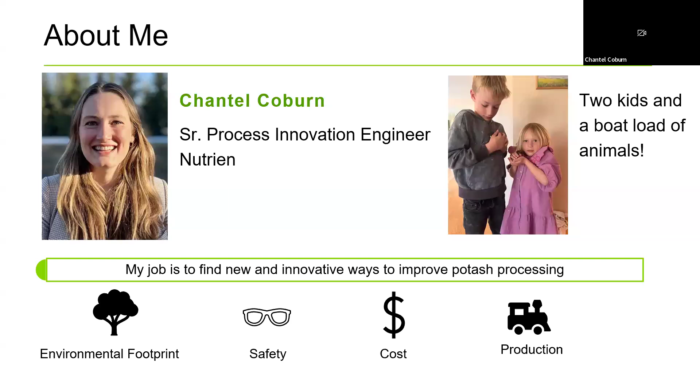A little about me, Chantel Coburn. I am a senior process innovation engineer at Nutrien, and really my job is to find new and innovative ways to improve potash processing. That can encompass a few different things: looking at ways to reduce our environmental footprint, improve safety to our operators, reduce the cost of potash that we make, or increase our production. That's the work part of me. And then the other 51% of me, I guess, is the fact that I have 2 little kids and a boatload of animals. So there they are with our new chicks.

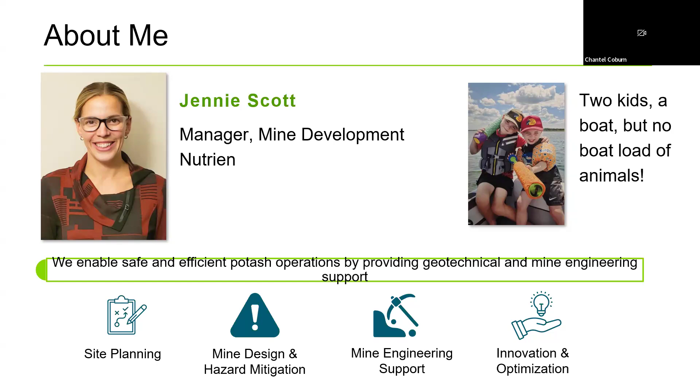So for today's agenda, we're going to talk about what potash is. This is going to be very like Potash 101, so if you're an expert, you'll probably know some of this already. We'll talk about what potash is, the geology of Saskatchewan and how we got the potash we have here, then go into mining 101, and then Chantel will take over and talk about processing.

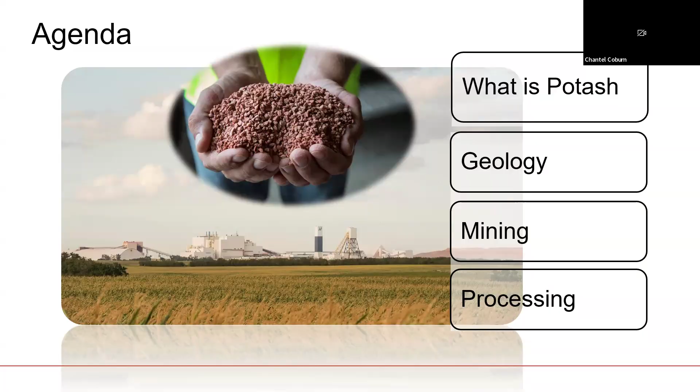So to start us off, what is potash? Potash is a generic term for a variety of mined and manufactured salts, all of which contain the mineral potassium in a water-soluble form. So it's a very generic thing, but what does potash mean in Saskatchewan?

Really, what our potash here is made up of is about 40% sylvite, 55% halite, and 5% insolubles. The 40% sylvite is the potassium salt, and that is what we want - that's what we're trying to mine. We want to get that potassium, and that makes up about 40%.

The 55% halite is just regular old NaCl, or table salt - the stuff you put on your French fries - and we've got 55% of it in our ore body. The remaining about 5% is what we call insolubles. Often we'll refer to these as clays or clay seams, but they're not actual clays - they're fine-grained anhydrites, dolomites, quartz, and other fine-grained insoluble minerals.

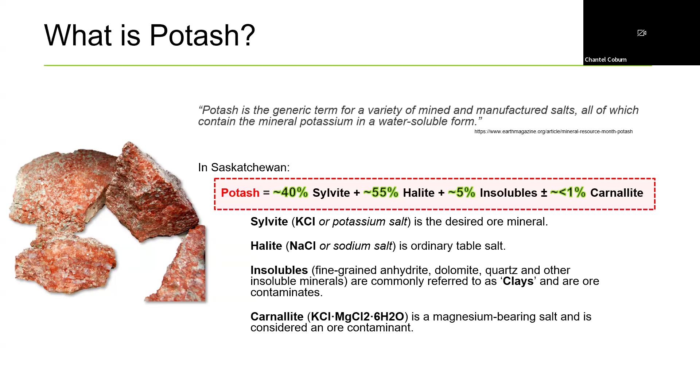And then we do have a little small percentage of carnallite. Carnallite is a magnesium-bearing salt. It's considered an ore contaminant - the mine doesn't like carnallite, the mill doesn't like carnallite - so we try to avoid carnallite if we can, but we do sometimes get a little bit of it in our potash mines.

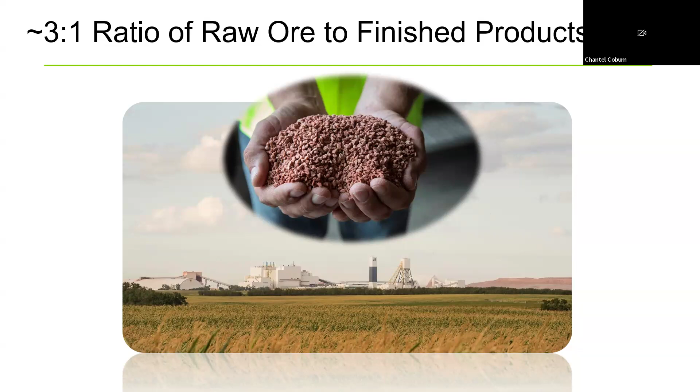There's about a 3-to-1 ratio of raw ore to finished product. What that means is, since we have more halite than sylvite, when we bring raw ore to surface, for every 3 tons we bring up from the mine, we end up with about 1 ton of finished product. The rest, about two-thirds of it, ends up going to that beautiful pink tailings pile in the lower right of the picture. So when you're driving through Saskatchewan, you'll see lots of these pink hills near our potash mines off the highways - if you see those, they're basically salt for the most part.

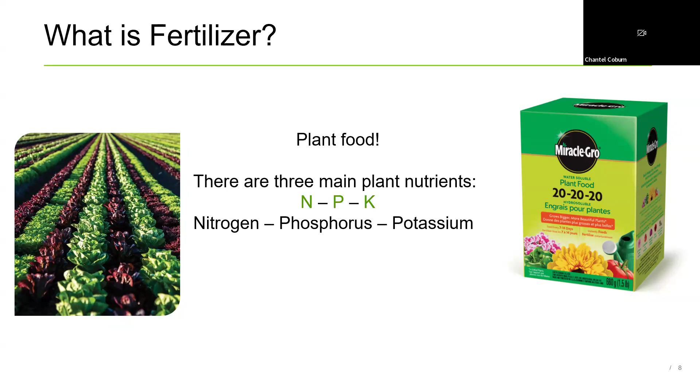And of course, what is fertilizer? I talked about us wanting to get that potassium out of what we mine - the potassium is used for fertilizer. There are quite a few different uses of potash or potassium, but really the main thing is fertilizer. Fertilizer is obviously plant food - we feed our crops with it, we grow strong crops because of the nutrients we put into the soil from the fertilizer. There are 3 main nutrients in fertilizer: nitrogen, phosphorus, and potassium. Where our potash mining industry comes in is that potassium piece.

Okay, so we know what potash is, we know what it's used for, but why is it here? The really cool thing with Saskatchewan potash geology is that we have the best potash deposit in the world, right here in Saskatchewan. So right under all of our feet right now, we have this world-class deposit. So why do we have this deposit? How is it here, and why is it so great?

About 360 to 390 million years ago, the Earth didn't really look how it does now - our continents weren't in the same spot. If you think back to your high school or elementary school days, if you remember the term plate tectonics, there are plates that move around, and so things aren't where they are now, where they used to be, I guess.

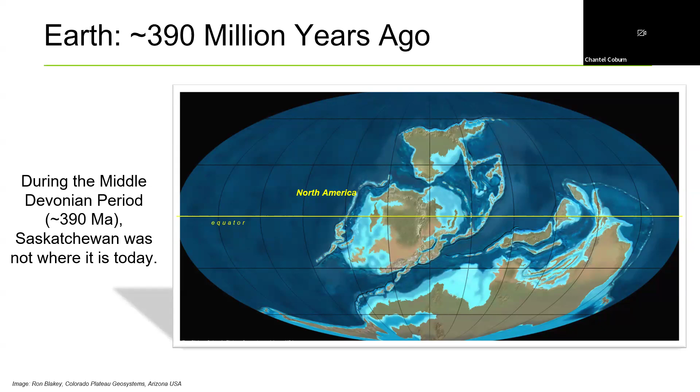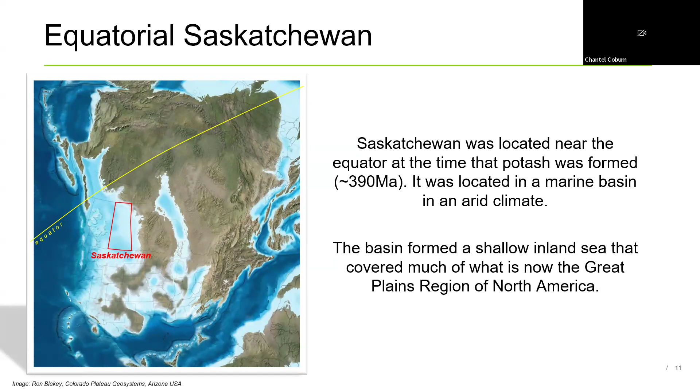360 to 390 million years ago, Saskatchewan wasn't where it is now. It was located right near the equator, in a marine basin in a very arid climate. That's when potash formed. If you think about a hot holiday near the equator, there's often an ocean, it's hot, it's sunny. This is a very important piece to how our potash formed.

Basically, there was a bit of a lagoon or a low-lying inland sea where Saskatchewan was, and it was hot. The water evaporated and left behind potash and salt deposits. There's a bit more to it: a reef in the northern part of the basin called the Presqu'île Barrier Reef restricted the influx of fresh water into that lagoony, low-lying sea. Shallow waters, intense sun, and evaporation led to this amazing deposit called the Prairie Evaporite Formation.

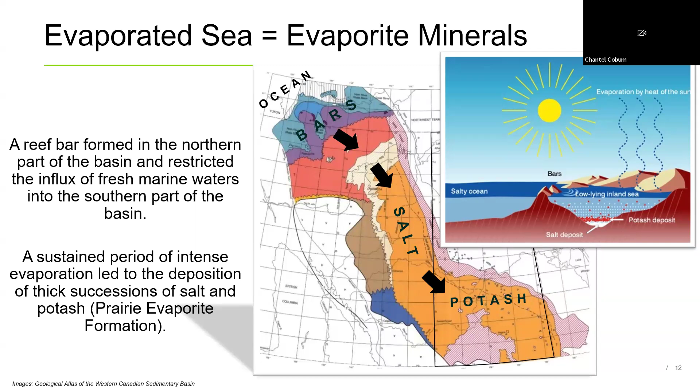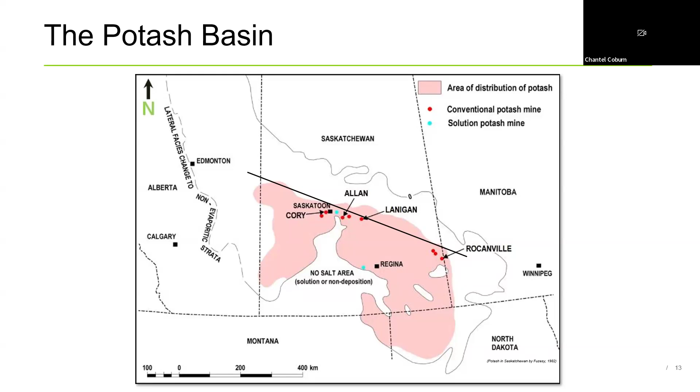So you know where the potash is — how do we get to it and how do we mine it? How do we get underground? When you drive to our potash sites in the province, you'll generally see two tall buildings — these are our shafts. You'll always see a smaller shaft and a taller shaft.

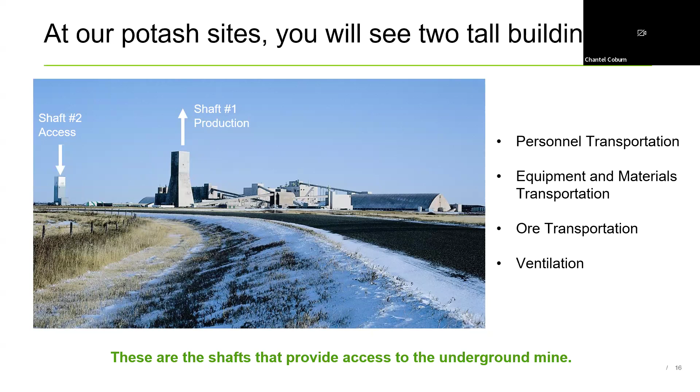I wanted to put a couple slides on the shafts themselves because this is important, the construction side of things. So how do we sink a deep shaft, 1,000 meters deep, when they're such a critical component? If we didn't have our shafts, we wouldn't have our potash mines.

I pointed out that Blairmore Formation a couple slides ago. That's an important formation because it's a sandstone formation. Basically, if you were to go to that formation and scoop it with a shovel, it's essentially beach sand. It's an aquifer, full of water, and loose, unconsolidated sand. So it's something that's very, very difficult to sink a shaft through.

In fact, the first potash shaft ever attempted was in Saskatchewan, in the Unity area. Because of this formation, they got as deep as that formation, it flooded the shaft, and they just couldn't get control of it and lost the shaft. So we don't have a shaft or a mine in that location because of that.

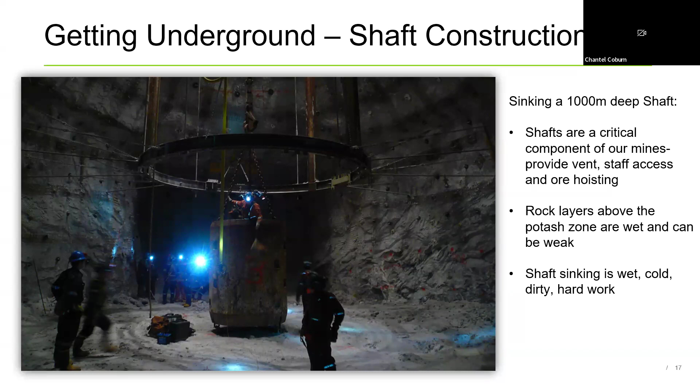After that, we had to get smarter and figure out exactly how to mine through these formations to get to the potash. So this picture is of our Scissors Creek shaft. This is our newest shaft at our Nutrien-Rocanville mine in the southeastern part of the province.

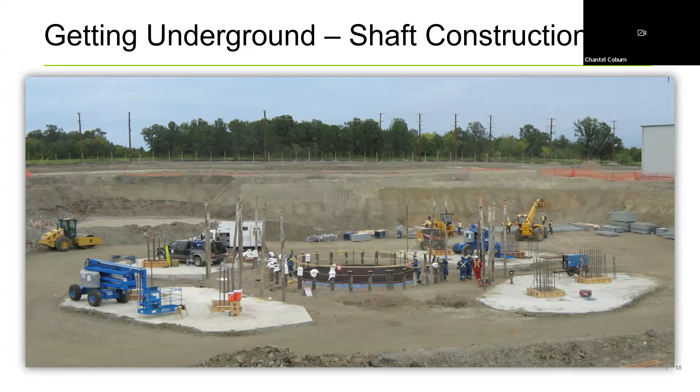This is before the shaft construction. If you look at all of these pipes sticking out around the diameter of what will be the shaft, those are called freeze holes. We have to freeze the ground in order to sink through it. Really what we're trying to freeze are those aquifer layers, and the most important one is that Blairmore Formation. So we freeze down, those pipes go a little bit deeper than the Blairmore, and we freeze that ground so that we're able to sink a shaft without flooding it as we go.

So those cast iron tubbing pieces are basically these rings that go in at the aquifer locations. At the Blairmore Formation where we froze, we would install these cast iron rings, and this is basically what prevents our shafts from flooding and withstands the pressures of these water bearing formations.

Fun fact about those cast iron tubbing rings: there's a display at the Western Development Museum as well as at the Saskatoon Airport in the baggage carousel area. There's a little display that explains these rings and talks about them. Pretty cool innovation, and without these, we wouldn't actually be able to sink our shafts in the province.

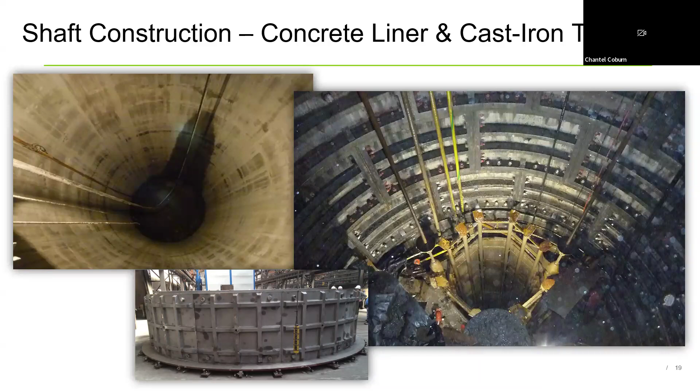But it's a lot more open than people expect. We've got full travel ways, full vehicles cruising around down there, and it's kilometers and kilometers long, so they're quite large. Okay, so we've made it underground. Now we're going to talk about the mining process.

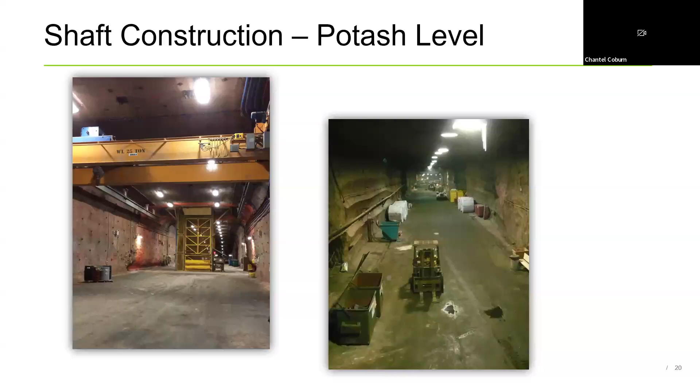If we were to mine not that far out, but close to the shaft, and start doing a bunch of mining around it, we would actually impact our travelways and they would start to deteriorate on us. So it's very strategic why we do this style of mining.

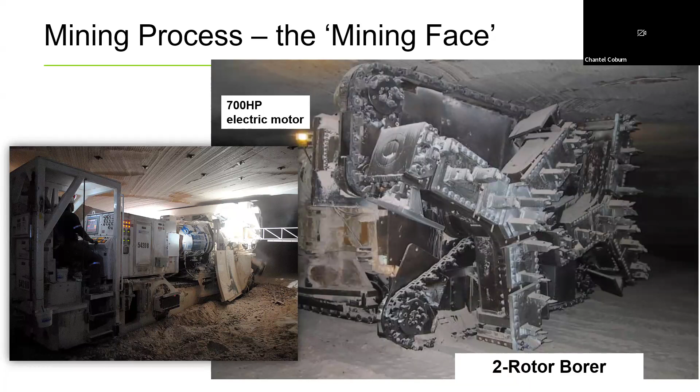Those are bits. Basically what happens is these rotors start to spin together, and then the bits spin as the borer advances into the rock, into the face, and those bits go into the face, into the rock, and start to grind the rock. So they're spinning and grinding that rock. There's actually a conveyor belt in the throat of the machine, so the rock is falling to the ground and getting sucked up into the throat onto a conveyor, and then it's going to the back of the machine. So that's the process of cutting at the active face.

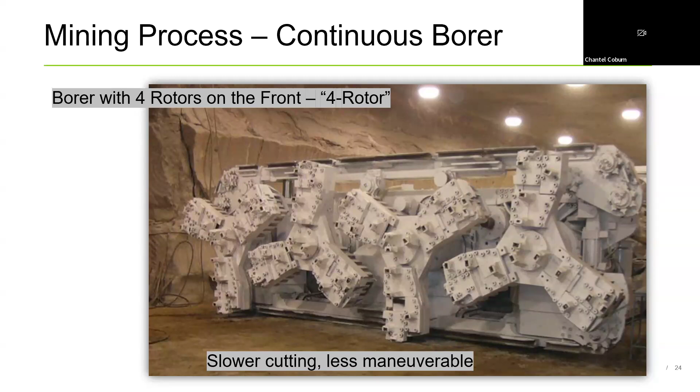We also have these rotors, or borers. I mentioned some have 4 rotors, so these are wider in profile. Depending on the geology and where you are in the province, that dictates whether you can use a 4-rotor or a 2-rotor machine - the geology dictates how we mine. In many cases it'd be great to mine wider or larger spaces, but we're limited based on what our geology allows us to do. These 4-rotor machines are used more in the southeastern area of the mine, where we have less clay seams and different ground conditions.

In a perfect world, if we could mine underneath them and not send these clays to the mill, that'd be great, because the mill doesn't want these - they want to get them out of the ore. But the problem with those clay seams is they're very weak and they will fail. So we don't mine underneath them because we know we'll end up with ground issues and our roof or back can cave in if we leave those seams above us. So it's very important for our operators to use these seams as a guide of where to mine - they pay attention to these seams as they mine along and make sure they stay along them, cutting them out.

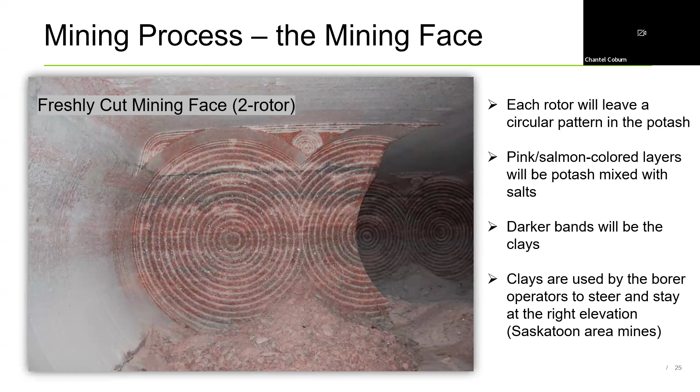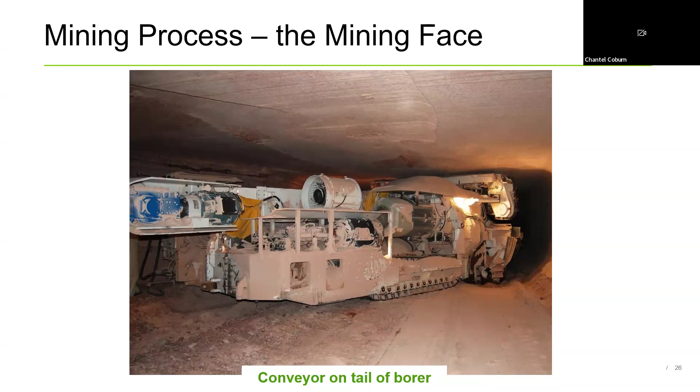So this is the back of the machine. In this case, the front rotors are up here, and I mentioned that the ore will come up the machine and onto a conveyor. So here's the conveyor on the tail of the borer - that ore is going to come up and dump off of that tail as the machine advances forward.

Basically, it allows the mining machine or borer to advance forward, back up, and go at different angles, all while having those conveyors attached behind it. From these bridge conveyors, there's another conveyor called the panel conveyor behind them. So once you cut the ore, you're dumping it onto a series of conveyors all the way back to the shaft.

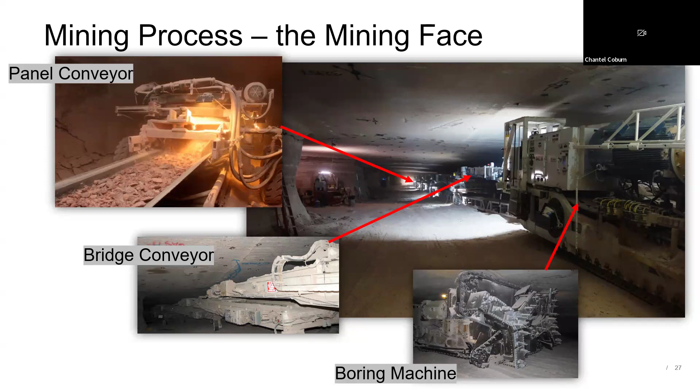Out of the actual mining room, the ore then goes onto what we call mainline belts. Again, just a conveyor belt, but these are special in that they're often wider and actually hung from the roof or the back of the mines.

We find in our potash mines that the roof stays in better condition than the floor. Often the floor will buckle up or heave, partly because of the clay seams in the floor. So we mount these mainline conveyor belts onto the roof for long-term maintenance reasons, so we're not dealing with ground conditions as the ore travels back to the shaft. We have tens of kilometers of travelways or belt lines for the ore to make its way back to the shaft.

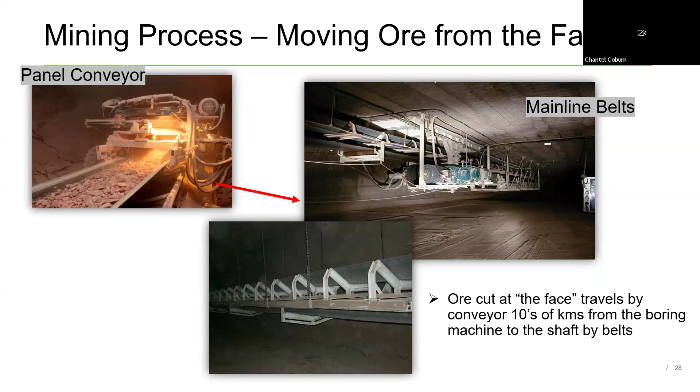Essentially the ore gets onto these mainline belts and just dumps from one belt to the next all the way back until it makes it to the shaft area, where we have bins.

The bins basically decouple the mining process from the surface operation. The ore can go all the way back to these bins, and let's say the mine has a down day but the mill wants to keep running. If our bins are full, we can keep feeding the mill so it doesn't have to shut down, even if we need to take a down day in the mine.

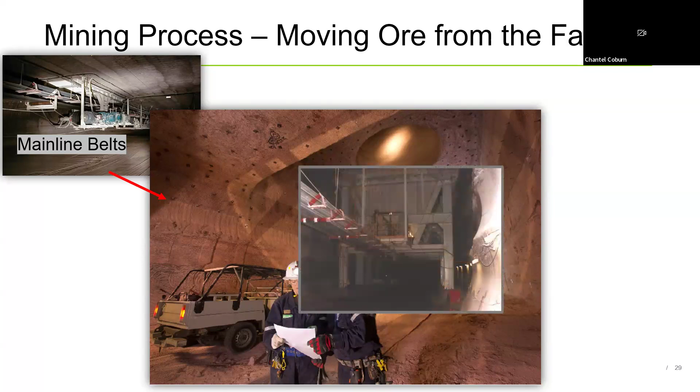So that's what a bin looks like after we cut it. This is just to show what a bin would look like once you get all the infrastructure in - you can see all the steel there. Basically the ore would come into the bin from the top and then come out at the bottom.

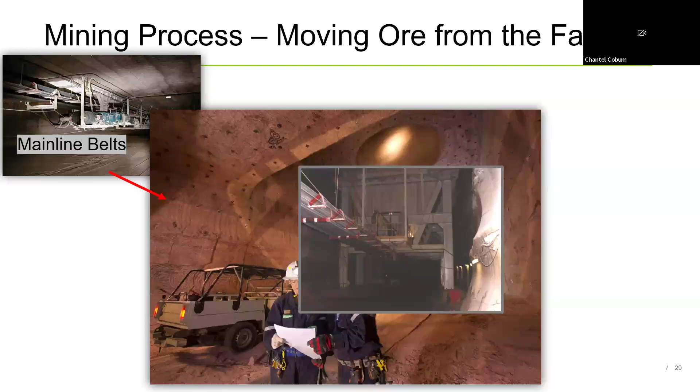From the underground bins, material is weighed underground by belts and then loaded into skips. The skips are what's actually inside the shafts, inside the production shaft, and that's what's actually carrying the potash ore to surface.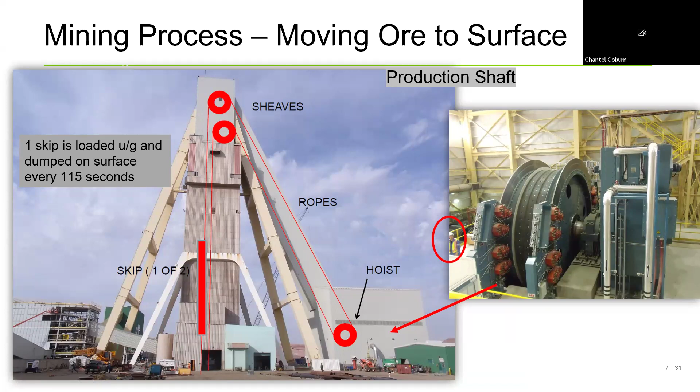Okay, so that's basically the process of potash mining, pretty high level, but essentially then we get the potash to surface, and from a mining perspective, we don't know what happens. It just goes into this black box we call the mill, and they process it. So Chantel's going to tell us what happens next.

Perfect. Thank you, Jenny. All right. What is potash processing? The magical black box. So really, it's how we get from this, the ore that Jenny worked so hard to get up onto surface, to this, our final product.

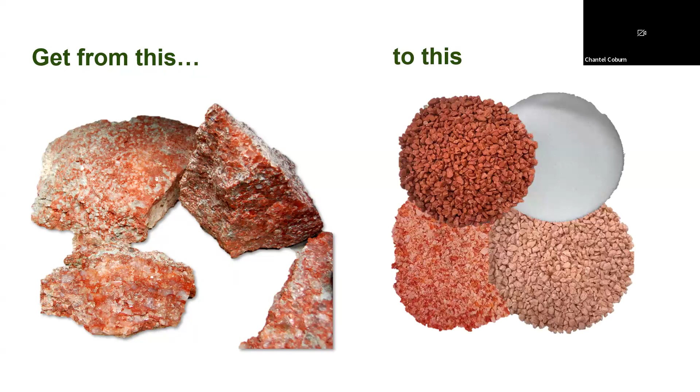So we kind of went over this, but just a little bit of a deep dive again. So the ore that comes up to surface, it's composed around, depending on the ore body or the mine site, 40% KCl. That's the potash part, that's the stuff we want. And then there's around 55% NaCl, the salt, and then 5% insolubles or clays, what have you. That's the stuff we don't want. And they're quite intermingled with each other, so it takes a little bit of work to actually get them separated.

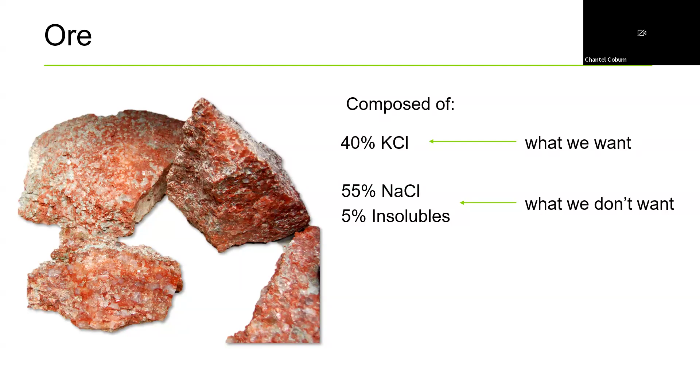And just as a little bit of a side note, this is really a presentation discussing conventional mining where we get the ore from underground, bring it to the surface, and process it conventionally. But I will touch on crystallization, which is the premise of how solution mining works as well.

So then our product, we call it muriate of potash or MOP, and it's composed primarily, or 95% KCl, so that's the potash part, and sometimes more. So on the picture on the left, the red and the pink, sort of coarser looking material, that's our granular potash, and that's used in mechanized farming and is often mixed with nitrogen and phosphorus and gets applied to fields.

The one on the bottom left down here, that's called standard product, and that's typically sent to Southeast Asia, and it's hand broadcast onto rice fields, things like that. And then this white stuff up here, that can be up to over 99% purity, and it's an industrial grade product, used in things like pharmaceuticals, the chemical industry, things like that. So it's really, really high grade.

And there are other varieties, but these are just an example of some. And the reason this is darker and this one's lighter on the granular product is just it's from different ore bodies.

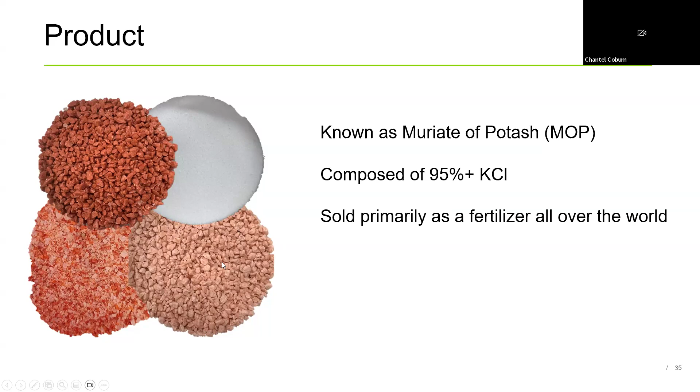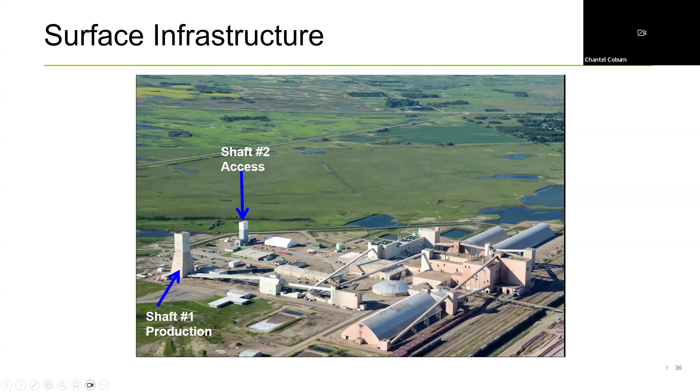So a little bit of a take on what the surface infrastructure looks like from the outside. Jenny already talked about the production shaft, the access shaft, and then you can see from this production shaft, there's belt galleries that take the ore all the way to our processing buildings, our mill buildings right here. So this particular mine site has 2 mill buildings. They were built at different times, but depending on the facilities, there's often just one.

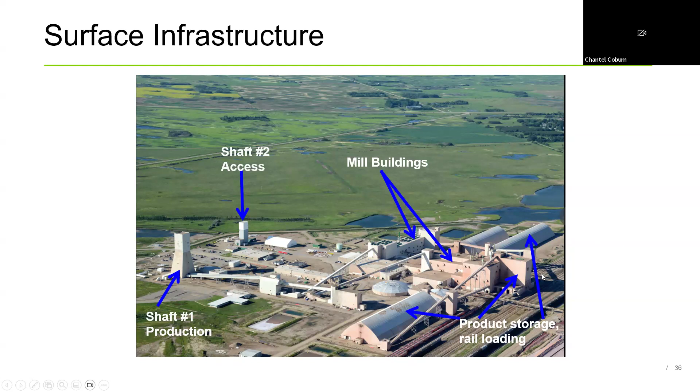And then after that, we have our product storage buildings. So these are the buildings where our product goes before it's loaded onto rail cars and shipped all over the world. So now let's take a look inside those buildings.

So we're going to go through the mill process, and hopefully it's not too overwhelming or confusing. So again, once ore is on surface, we need to go to crushing and screening. So crushing and screening, really the goal of it is to liberate the KCl, the potash, the stuff we want, from the NaCl and insolubles or slimes, that's the stuff we don't want, without creating excessive fines, because the fines are really hard to recover and separate from each other.

So this fun picture right here is called a QEMSCAN image. The purple represents the salt, the green represents the KCl, and the gray kind of represents the insolubles, probably anhydrite or something in this picture. And you can see that at this size of particles, they're mostly liberated is the word we use. So the particles are separate from each other, though there are some that are still together, and we don't completely crush to liberate all the particles just because of the fines I talked about.

So there's actually a regrind stage later on. And then we send that ore through to these crushers. This is a common type of crusher in our mills, called a cage mill, just as a size reduction.

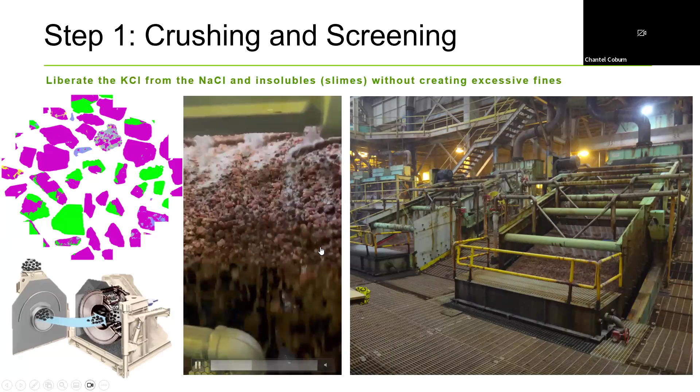And then we use screens. There's various different varieties of screens, lots of newer ones, but they essentially all do the same thing. We screen out the material that's on size, and everything that's still oversized goes over the top and gets another round of crushing. So once we have our on-size material, it's important that we need to de-slime it, get rid of those insolubles. The slimes or insolubles are deleterious to the flotation process, so we have to remove them prior, or else we use excessive reagents and the process just isn't efficient. So it's really quite simple, but very important to get done right.

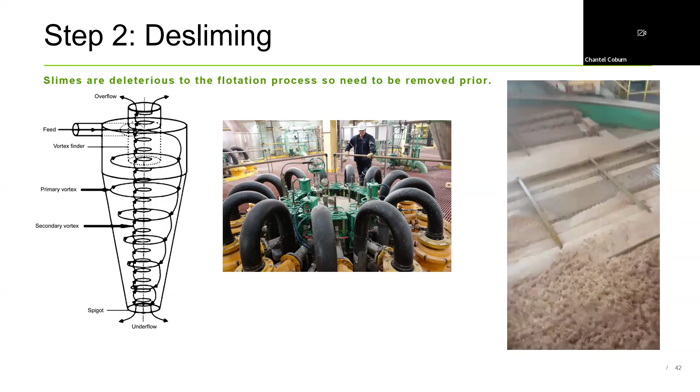So we primarily use cyclones or hydroseparators in the desliming process. Cyclone operation's quite simple. Really, it just uses centrifugal force, and the really fines and the brine go out the overflow, and then the on-size product, which is higher in density or higher percent solids, goes out the underflow. We then use hydroseparators, which use fluid dynamics essentially, and the really fine stuff, which ends up being the clays, comes to the surface, and then the KCl that we want to recover goes to the underflow of these vessels.

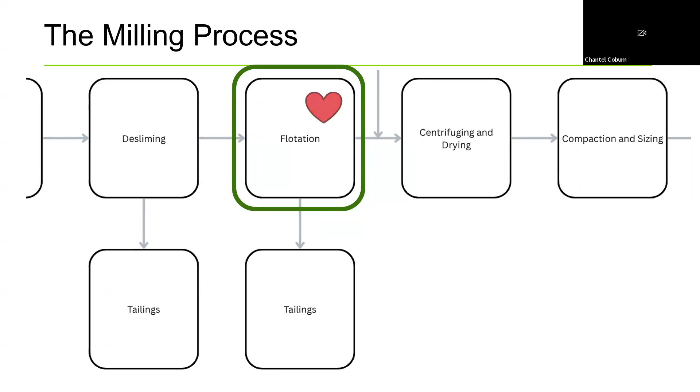So after our ore is deslimed, we move on to flotation, which is really, I consider the heartbeat of our mill process. And flotation is a physical chemical process that's used to separate the desirable minerals from the gangue minerals. So it is quite simple, but anything that's quite simple has a million little nuances that go with it.

In our slurry, as you noticed before, it's a wet process. The ore comes up dry, but we add brine to it once it gets into the mill. So we add chemicals to this slurry that we've created, and they're called reagents. And that allows the KCl to selectively attach to bubbles and float to the surface. That's our concentrate, the stuff that we want. And then the salt is what we don't want, and it's actually just left behind at the bottom. So you can see this fun image of bubbles collecting KCl particles.

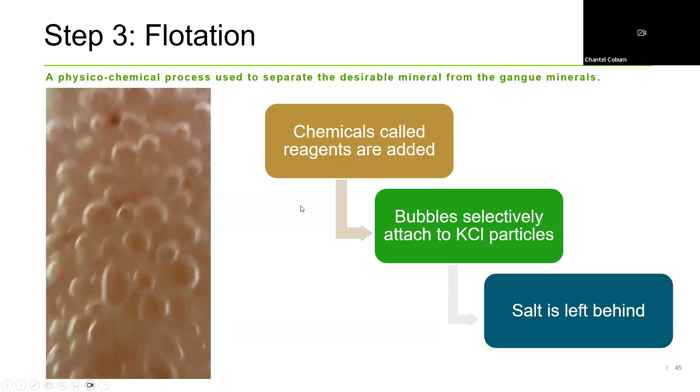And they've been added to our new mills. They're designed like that. And they're also added to the existing mills as cleaners, we call them, so they actually upgrade the concentrate grade of these mechanical cells.

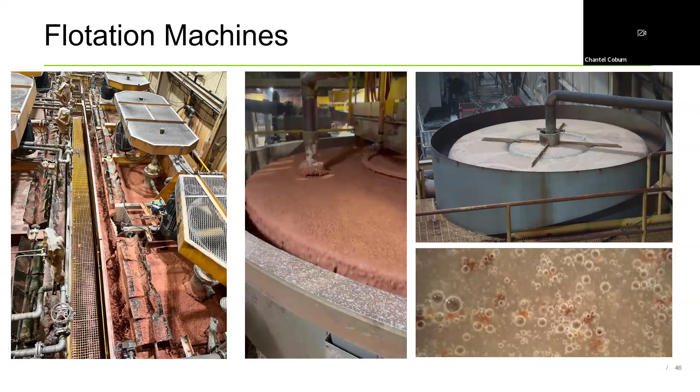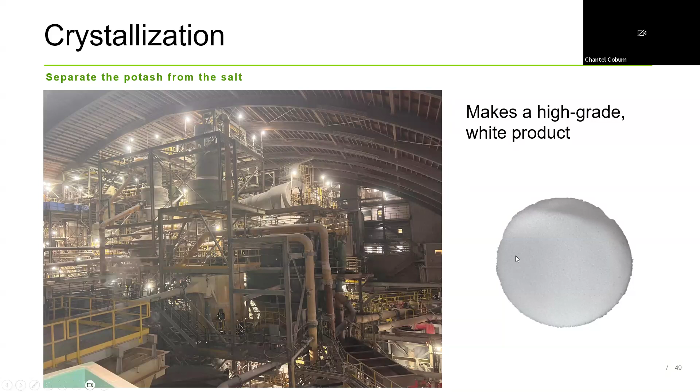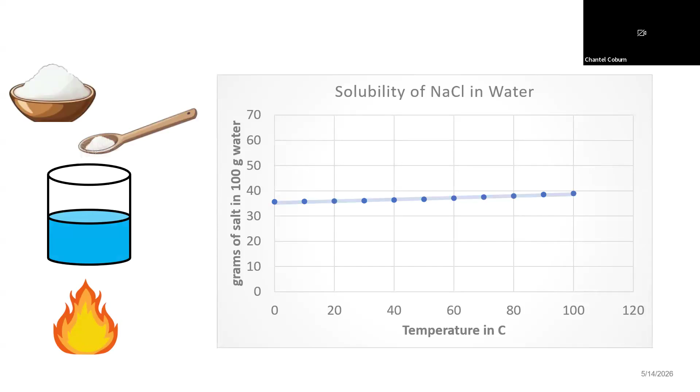A little bit in depth on how crystallization works. Let's take an empty glass, add 100 grams of water, and then add some salt. Add some heat and keep it saturated, adding more as the heat increases. Then you can watch that saturation line: the water can absorb a little bit more salt as the temperature goes up.

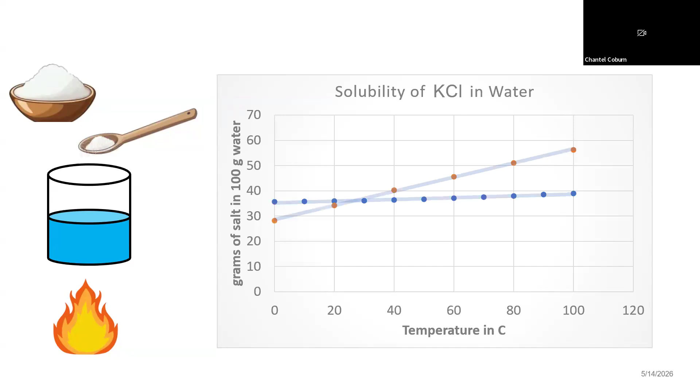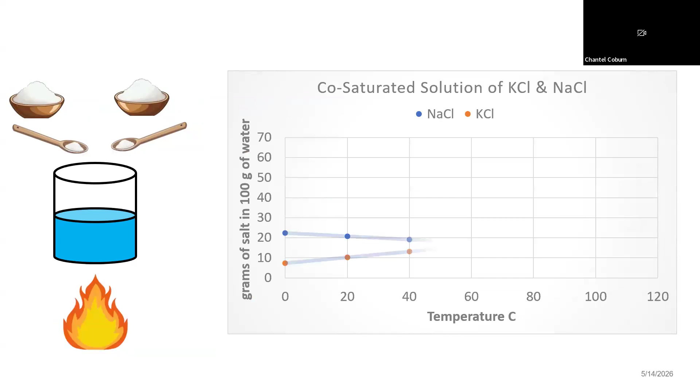But what happens if we add them at the same time? Again, take our empty glass, add 100 grams of water, take our NaCl and KCl, start adding heat, and pour them in at the same time. Interesting—as the temperature increases, the saturation of NaCl actually decreases while KCl increases. So at 100 degrees, the blue NaCl line shows the water can take just under 15 grams of NaCl, and around 22 and a half grams of KCl.

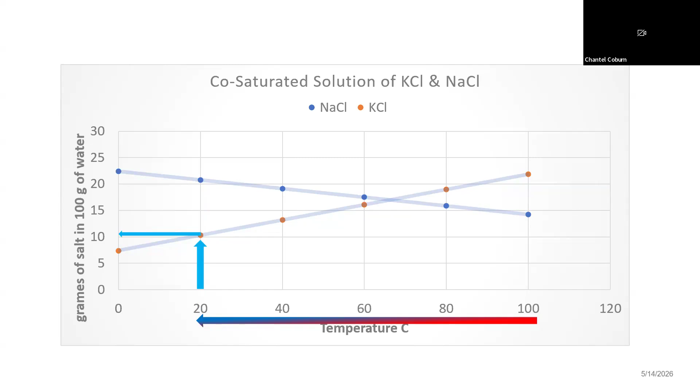The crystallizer circuit acts by decreasing the temperature throughout the bodies, as we call them. As the temperature decreases, the solubility of salt actually increases. So now the solution has the capacity to dissolve more NaCl, around 20 grams, while the KCl line is much, much less. So as we decrease the temperature, we've actually precipitated out pure KCl from the solution.

Now that we have our KCl and NaCl separated, we go to the centrifuging and drying process. This is the section of the mill I like to call the washing machine and dryer of the process. Here's a centrifuge from the outside, and an example of a centrifuge cut away from the inside—showing our wet, slurry KCl and NaCl particles mixed in brine.

We send it through the centrifuge, and it works like the spin cycle of your washing machine. Centrifugal forces go around, the screw pushes the now dewatered particles through the end, and the brine comes out the other side. So then we have our damp particles, like damp clothes, that we now need to throw into the dryer.

Here's an example of two common dryers in potash mills. There are others, but these are the most common. This is a fluid bed dryer—a video from inside one—which has plates on the bottom, and air percolates up through the bottom creating a turbulent environment where the hot air and potash mix to dry it.

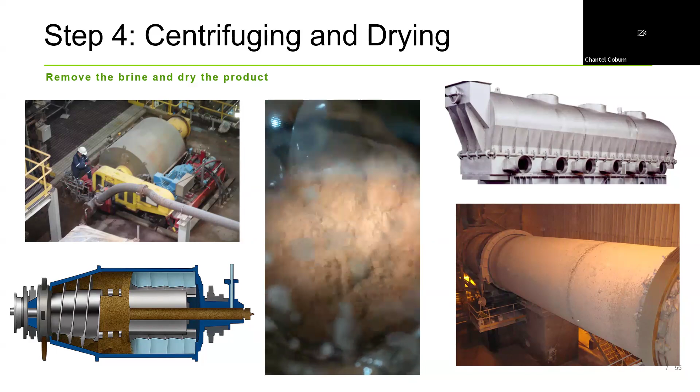This one's called a rotary dryer, and it's exactly like a clothes dryer at home. The potash comes in, it tumbles, hot air mixes with the potash, and out comes a dry product at the end. I didn't specifically call it out, but that hot air does pick up fine particulates of KCl. We either scrub it or send it through electrostatic precipitators and cyclones to remove those particulates so we aren't releasing them to the environment.

Okay, so now that we have our dried product, we need to turn it into something that people actually want to buy.

Compaction and sizing. So what comes out of our dryers can be a wide variety of particle sizes depending on the crystals that we've collected - there can be very fine to quite coarse. We send them through these machines called compactors, and they're essentially two rolls that just squish all that material together to make a flake.

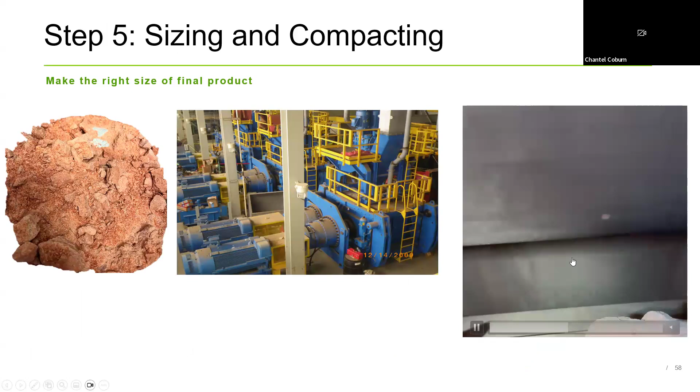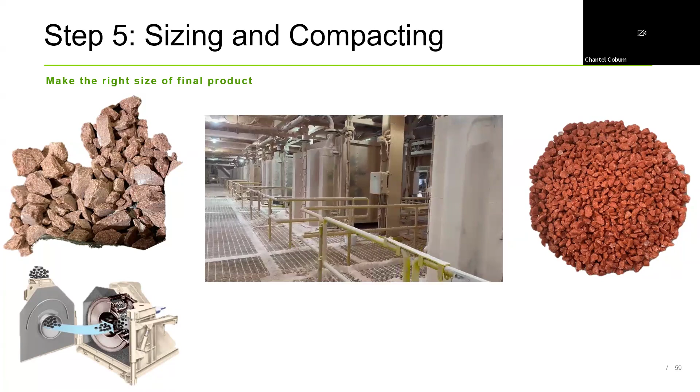And you can see some good examples of flake coming out here. Then we send that flake through crushers - similar concept to the crushers and the crushing and screening circuit of the ore - to crush it up into smaller sizes. These are the screens we use for dry processing. Eventually we get a super uniform product that looks like this using this process. There are tight specifications, and we want to sell the exact right size to the farmer so it can blend well with the other fertilizer types.

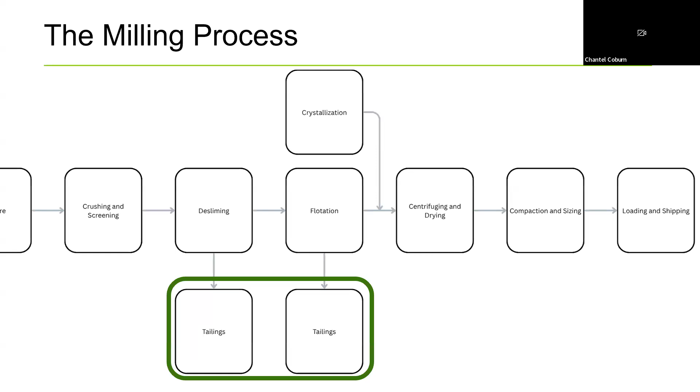Before we go to loading, we'll also talk about tailings. So all that stuff that I talked about that we didn't want, we have to do something with that as well - that's called tailings. As Jenny mentioned, if you drive around Saskatoon or in the Southwest or by Regina, there's huge piles, typically red or pink piles of potash outside of our facilities. Those are known as our tailings piles. That's primarily salt, and then we also have special areas to store the slimes or the insolubles as well.

To keep them at a constant level, we actually deep well inject - meaning we pump the extra brine really deep underground in a safe place that we can store it.

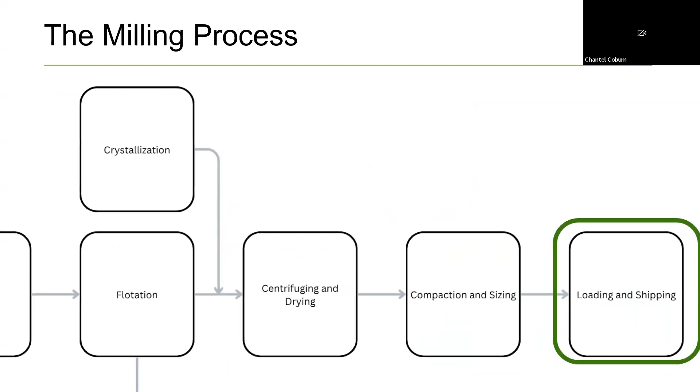All right, finally, loading and shipping. So once we've gone to all the work to separate the KCl from the NaCl, and safely stored our tailings, then we load out that product onto rail cars. Across our sites, we load hundreds and hundreds of rail cars every single day. Those rail cars then make their way to the coast where they're loaded on ships and transported to all the continents in the world.

From there, they then maybe go on other rail cars, trucks, et cetera, until finally they reach the farm where they're destined. This is really no easy feat - the logistical challenges of transporting millions and millions of tons of potash from Saskatchewan, which is really the interior of the continent, all around the world, is quite amazing.